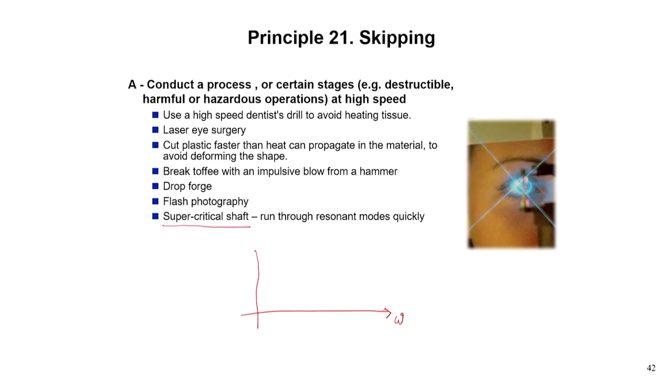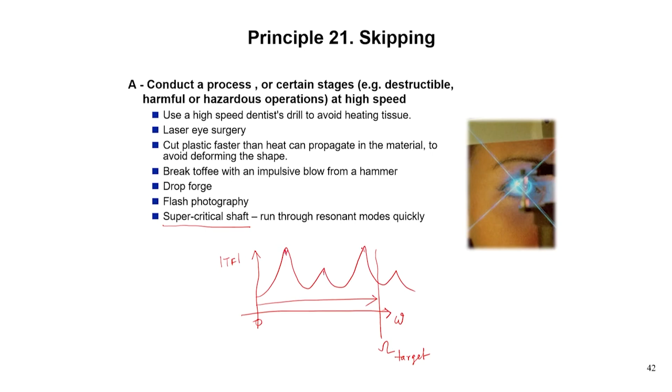So, if I consider a particular flexible shaft, and let us say these are the natural frequencies and this is the transfer function, it would have many such resonating modes. Now, let us say I have to reach somewhere here, this is my omega target, that is the frequency of rotation. So, you have to do a frequency sweep very fast from 0 hertz to this point, so that all these resonating points would not get any chance to disturb the system.

The next interesting sounding principle is principle 22, that is blessing in disguise. Many times we think that certain things are harmful, but actually if you can control the harmful effects of the environment or surroundings, you can even achieve a positive effect out of it. Let us say we know that heat is a waste, but if you can design a Stirling engine, then this waste heat can be used for generating some useful work.

Similarly, we say that sound and vibration are waste. They create noise. They also destroy the structure because of fatigue. But if you know how to transfer this mechanical energy from noise and vibration into useful electrical energy, which we call energy harvesting devices, then you can actually get something useful from an apparently waste thing.

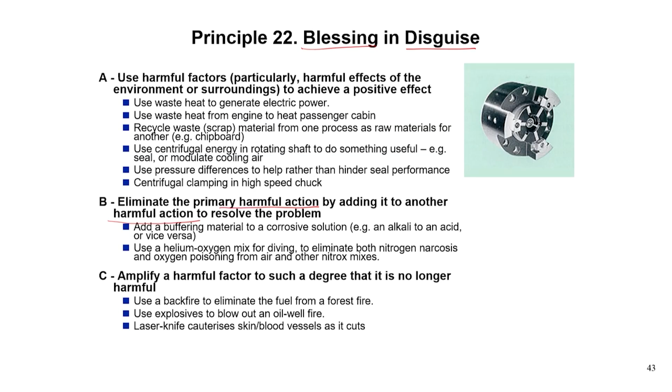I will now go to another very, very important principle that we use mostly for intelligent systems. This is principle 23, which is related to feedback. So, principle 23 is feedback, and this is important for any active system. If you have a feedback, then you can actually correct the system from the feedback, from the sensor. So, the first point is introduce feedback, referring back, cross checking to improve a process or action.

Any example you think of, like automatic volume control, or aircraft autopilot, or engine management system of an automobile, or thermostat for heater control, geyser temperature control, process controls, feedback is extensively utilized.

But there can be also a further case, that is, if feedback is already used, change its magnitude or influence in accordance with the operating conditions, like change the sensitivity of autopilot, or change the sensitivity of a thermostat between heating versus cooling, or use different types of complex feedbacks like PID controller, proportional, integral and derivative control. So, that is another way that feedback is present, but you make more meaningful use of the feedback. So, that is principle number 23.

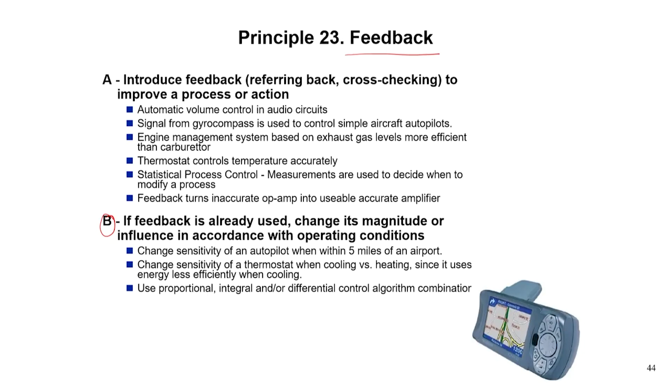Principle 24 we are going to talk about is intermediary. Use an intermediary carrier article or intermediary process. I always give the simplest example for this principle. Suppose you kept something very hot in your oven and you have to take it out fast. What would you do? Your hands would not be good enough to do it. So, you have to put on gloves. The gloves work as an intermediary, so that they take the thermal load, whereas you control the trajectory or the movement of the object. That is the essence of principle 24, or intermediary.

Here there can be two applications of this principle. A is use an intermediary carrier article or intermediary process, and there are many; I have just given one. Saving from hot objects, you use a coaster, or dwell period during a manufacturing process operation. In manufacturing we use the dwell period. Use a chisel to control rock breaking or sculpting process, that is an intermediary. Your hand would not be able to do sculpting. So, the chisel is the intermediary between you, your creative activity and the rock. The same thing you can extend to playing music: play guitar with a plectrum.

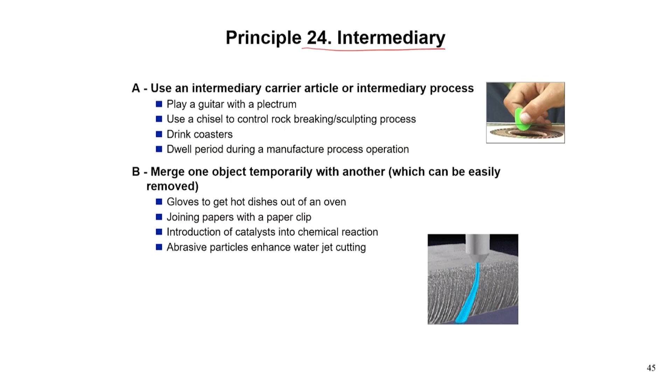So, this is the principle 24 of intermediary. Principle 25 I am going to talk about is of the self service. Self service is important, particularly it is important from the sustainable design point of view.

Okay. So, just think of one very simple example, that is the cone ice cream that you always take. Now, after you consume the ice cream, you are able to consume the cone also. So, as a result, it would not create any environmental pollution. So, the cover of the ice cream is actually giving you a self service.

Now, point A here is that make an object serve or organize itself by performing auxiliary helpful functions. And then there are many examples of it. I am just giving some examples. Self aligning, self adjusting seal, self locking nuts for manufacturing, these are very important, self cleaning oven, glass material.

Not only that, self sharpening of some of the blades, right, that is used for, let us say, hair cutting or even for the grass lawnmower, self sharpening, self repairing structure, self healing structures. These are all the self service. That means, you do not need any external service in order to maintain the structure.

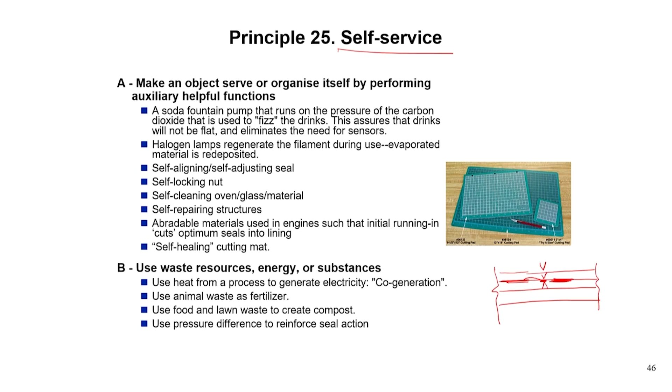Principle 26, we need not take it literally, but it is very, very important because it talks about copying. So, what does this copying mean? Of course, it is not copying in the exams. Copying is a very important principle that even nature uses every now and then.

In that sense, all our offspring are actually DNA copied from us. All our growth is actually the mother DNA getting copied multiple number of times. So, copying is something that happens in nature every now and then. Now, here we have kept three types of copying principles. A, instead of an unavailable, expensive, fragile object, use simpler and inexpensive copies.

Imitation jewelry is a copy; it gives you the effect of jewelry, but it is not essentially a valuable material, and that way it is also sufficiently robust, because most of the jewelry based on gold etc. is not so robust. And then there are many such examples you can think of.

AstroTurf, instead of the grass which is very fragile, you use the artificial grass today. The crash test dummy, instead of testing on anything living, you put a dummy. You remember that when ISRO sent the mission for testing the astronauts' condition, they put a dummy robot, so that the astronaut can be spared, but you will get all the important information about the different environmental factors that come inside the system.

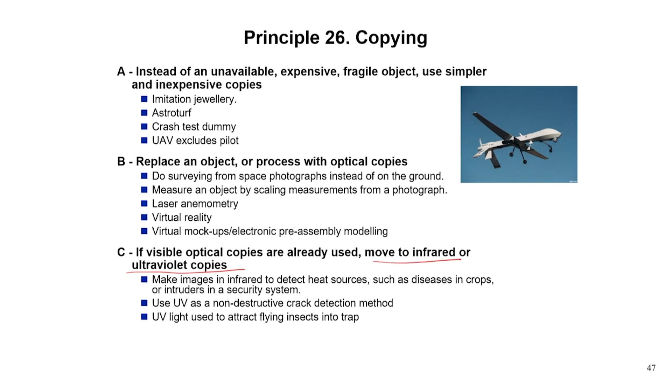Principle 27 that I am going to talk about is all about cheap short-lived objects. That is our principle 27. So, you see, the word disposable has become so successful today, and that is because it is relatively inexpensive. So, replace an expensive object with multiple inexpensive objects.

Fountain pens used to be very expensive. Now, with the help of these ball pens, it becomes inexpensive and you get the same effect of writing. So, that is something that is used very extensively, and remember, that is also one of the sources of major pollution, because we get addicted to using these cheap short-lived objects. So, disposable of course is one.

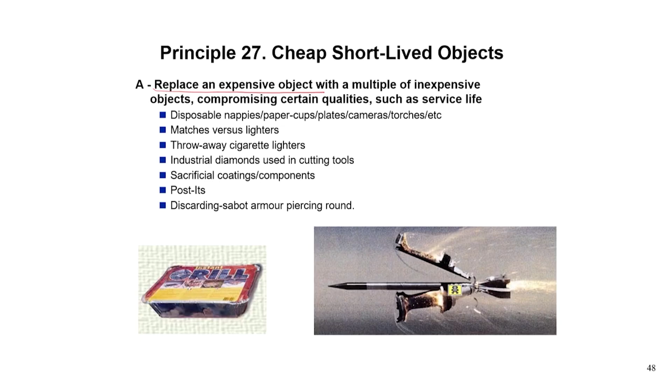Matches versus lighters, throwaway cigarette lighters, industrial diamonds used in cutting tools, sacrificial coating components, post-its, or discarding sabot armor-piercing rounds. So, all of these are cheap short-lived objects. You design it knowing fully well that it will have a short lifespan, but it will serve the purpose. Nobody is talking about designing something which will be working for years.

Think of a birthday party: the things that you use are only for a couple of hours. So, it has to create an ambience only during that small span. That is what 27 is.

28 is very close to our heart, and we call it mechanics substitution. Replace a mechanical means with a sensory, like optical, acoustic, taste or smell means. So, replace the mechanical means by something which is maybe electromechanical. In fact, the next clause is even clearer about it: use electric, magnetic and electromagnetic fields to interact with the object.

So, the entire use of what we call smart materials, which is so important for an intelligent system, you can think of these smart materials as the best example of mechanics substitution. Change from static to movable fields, from unstructured fields to those having some structure, like say magnetic resonance imaging. Use fields in conjunction with field-activated particles. So, all are examples of mechanics substitution.

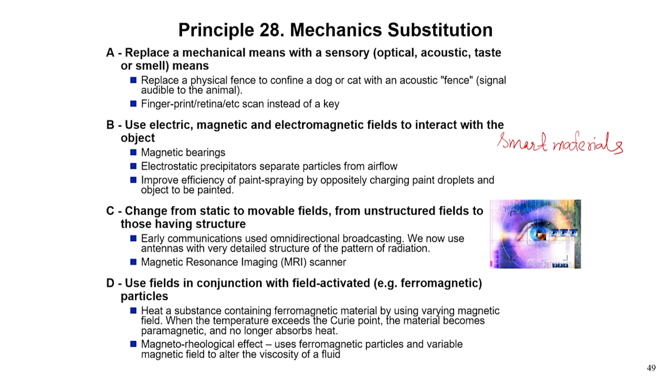So, basically you have certain tasks to do and there already exists a certain way of doing it, and when you substitute that way of doing it by using other techniques, like I said magnetic, electromagnetic, temperature or light, then that is the mechanics substitution we are talking about.

Principle 29 is about the use of pneumatics and hydraulics. They are some of the very important elements in terms of actuator design, particularly high-power actuators. So, use gas and liquid parts of an object instead of solid parts. Examples: inflatable or filled with liquids, air cushion, hydrostatic, hydroreactive substances.

So, what are the advantages of such a system? Well, one of course is that you can quickly build it, and it is less heavy. So, it is more deployable; almost all deployable structures are also inflatable. So, inflatable furniture. Then there are other things like hovercrafts or gas bearings, acoustic panels which incorporate the Helmholtz resonator.

A Helmholtz resonator, you can consider it to be a small chamber with a narrow exit in it. The specialty of this type of chamber is that while the chamber mass can be modeled as a mass, the air contained in it can be modeled as a spring, so that the Helmholtz resonator can give you a pure natural frequency. And using such a thing, you can actually control wave propagation, for example. Okay, so, that is pneumatics and hydraulics.

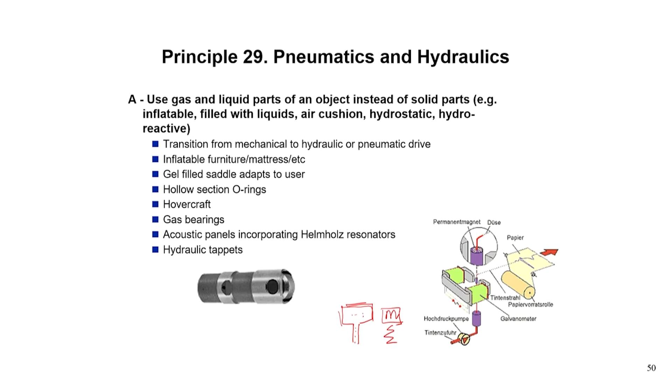The next principle I am going to talk about is flexible shells and thin films. As you know, almost all the advancements in terms of the structures, in terms of the housings that we design, be it automobile, be it aircraft, our direction of work today is how to make it lighter and lighter in weight. In order to do that, naturally you have to go for materials which are less stiff.

Now, that can give you double advantage, because if you use a flexible material like flexible shells or thin shells, then you not only reduce the weight, but also you can give an adaptive shape, particularly where this system is in interaction with fluid or air, let us say something for a ship or something for an aircraft. This adaptive shape that the flexibility can give is a boon in terms of the design. So, use flexible shells and thin films instead of 3-dimensional structures, like inflatable structures.

One important thing I want to tell you, that you will see some of the examples getting repeated while discussing other principles, and there is no wonder about it, because these principles are simply a spark point, an ignition point for innovation in your brain. They are not like mathematical formulas, they are not even like the axiomatic design axioms which cannot overlap with each other strictly. Here the principles can overlap, that is why the examples can also overlap, but these principles are kept so that you can keep in your mind the connectivity. Connectivity is very important here.

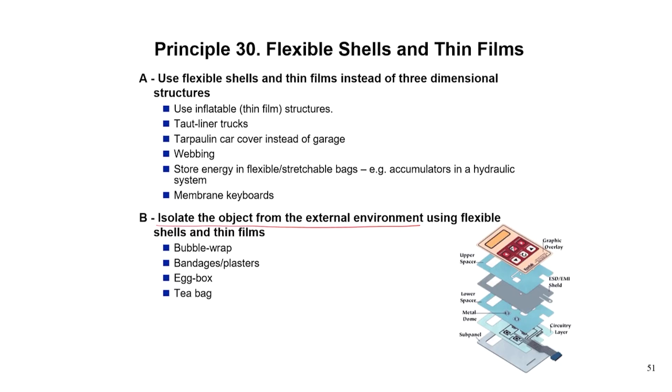Now, similar to these, another structural innovation that is used extensively is related to porous materials, principle number 31: make an object porous or add porous elements. It is particularly useful when you want to make something light, when you want to create thermal insulation, or when you want to create something like acoustic absorption. So, drill holes in a structure to reduce the weight, that is one broad way of increasing porosity. Foam metals, for example, or use sponge-like structures.

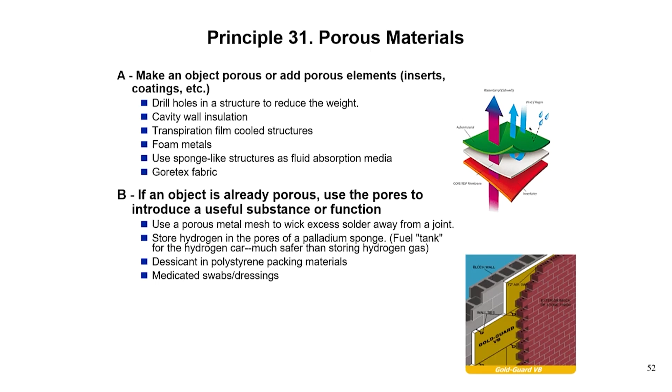And secondly, if an object is already porous, use the pores to introduce a useful substance or function, like use a porous metal mesh to have a wick kind of structure, and that is used for pulsating heat pipes, or store hydrogen in the pores of palladium sponge, because palladium can absorb hydrogen, and desiccant in polystyrene packing materials, medicated swabs or dressings. So, porous material has extensive applications where you want to enhance the surface area in order to increase absorption, be it material absorption or the absorption of energy and then dissipation of the energy.

The last principle that I will discuss now is color changes. Biological systems extensively use the color change principle, starting from, let us say, lizards or leaves. There are many examples in nature. Change the color of an object or its external environment, like use color changing thermal paint to measure temperature, light sensitive glass, use color for camouflaging, employ interference fringes on surface structures, color change in plastic, so that you can figure out whether it is at high temperature, particularly for child feeding spoons.

Then color change not only means change of color from red to blue or blue to green, etc. Change the transparency of an object or its external environment, like use photolithography or a smoke screen. In order to improve observability of things that are difficult to see, using colored additives is something that we use.

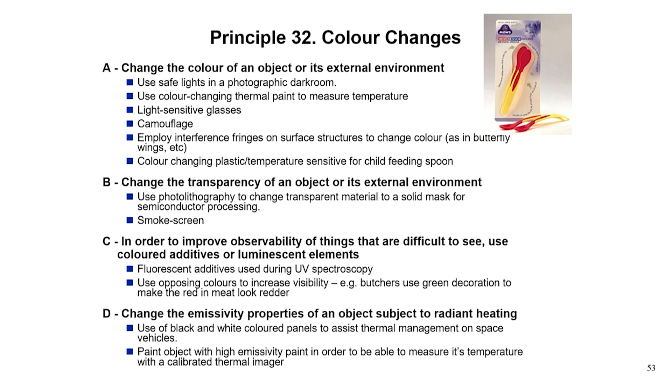This is where I will close today's discussion, and in the last lecture we will conclude with TRIZ.